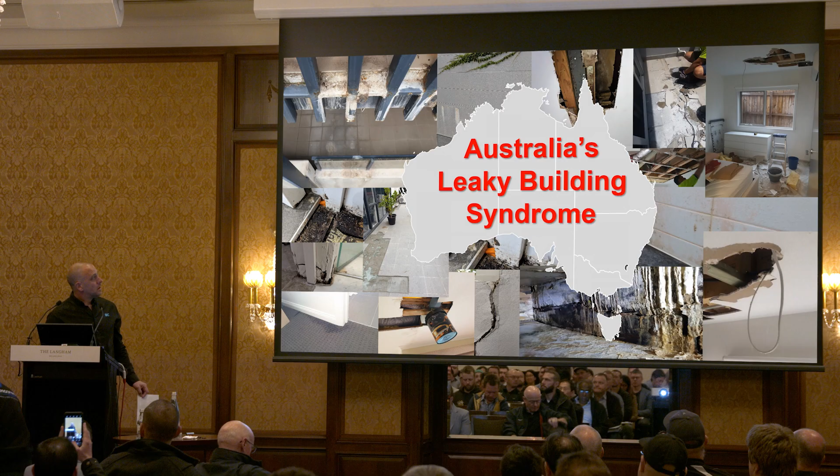And if you aren't aware, we're in a leaky building syndrome here in Australia. So I think that's why we're all here, because we are aware of it. And so we've been lucky enough to have the presence of the chair of the Waterproofing Membranes Association of New Zealand, to come over and talk about the history over there, what's happened there, and how it's very similar to what we're seeing over here in Australia. So I'll bring up Chris in a sec.

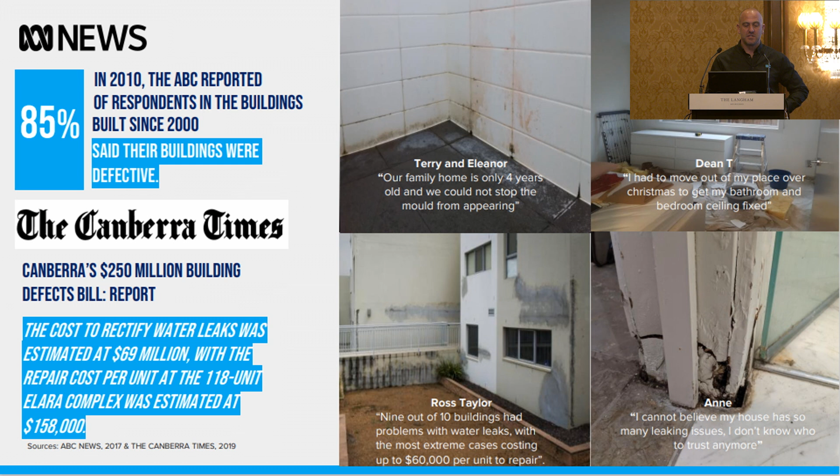So we're just going to run through, we actually have known about this problem for quite some time. So you see up there, top left-hand corner, in 2010, the ABC reported of respondents in buildings built since 2000, their buildings were significantly defective. And then as we go through time, a lot of these jobs here, these three here, are actually clients that I've dealt with. 4 years old, this property, class 1 building, volume house.

4 years old, that property, both bathrooms rectified, significant mould, which, you know, we're going to hear from Tim Law, who's a professor on mould and studying condensation. So we're going to hear about some of the severity related to that. Class 2 apartment building here, 18 months old, significant water ingress through the balcony.

This house here, ticking time bomb, 0405, triple storey townhouse in Ascot Vale. No warranty claim from the insurance, no builder's warranty left, 300 grand we estimate to repair her house. And then obviously we're familiar with Ross Taylor and what he's been doing up in New South Wales. So we're starting to capture some data.

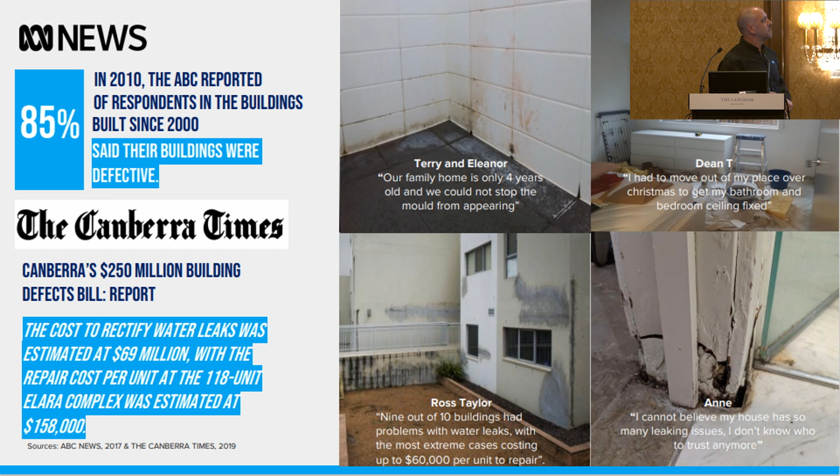So in 2019, I've caught up with Dr. Nicole Johnston on regular occasions. She was engaged with Deakin Uni in a joint study with Griffith University, where they did a combined audit on 212 buildings across the eastern seaboard to investigate combustible cladding. Non-biased study, what they found was that waterproofing defects were much more significant and deep-seated.

So I think you've got a crisis in this country. I don't want to downplay the issue in relation to combustible cladding, but I think water penetration issues in buildings are much, much bigger. I want you to put your hand up if you know anyone that's had a leaky building issue. Yeah. So for those of you who couldn't see what I could see, that was over 85% of the room.

We had 330 up in Parramatta. Obviously there's a bit more heat going on up in New South Wales, so there's a bit more urgency to get up to speed with what's coming in. I think there were 5 hands that stayed down. So everyone over the coming years is going to become very familiar with this if you're not presently.

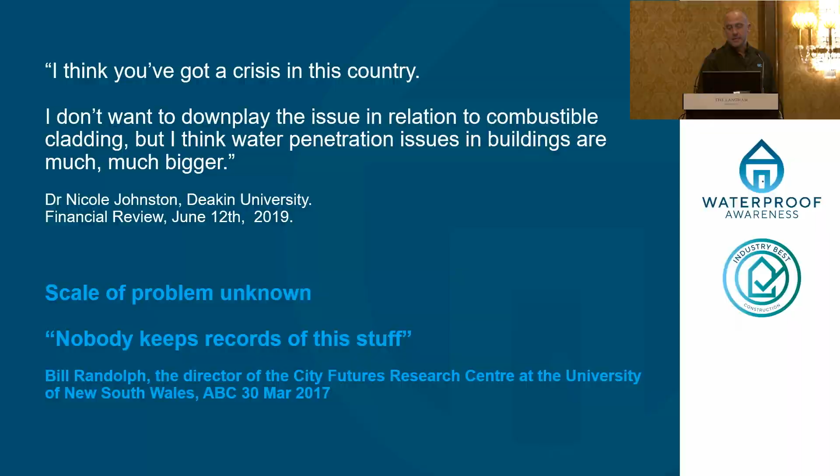So scale of the problem, unknown. Nobody keeps a record of this stuff. So that was back in 2017 by Bill Randolph. So I did this slide a little while ago. It's a little bit hard to get the data now because of COVID, but I am hearing that the building industry has not slowed down at all.

In 20 years, 3.5 million houses and nearly 700,000 apartments is what we've built. I've been doing audits in the class 1 sector, in the volume sector as well, and there hasn't been one house that would pass an audit. And we're building them quicker than you can repair them.

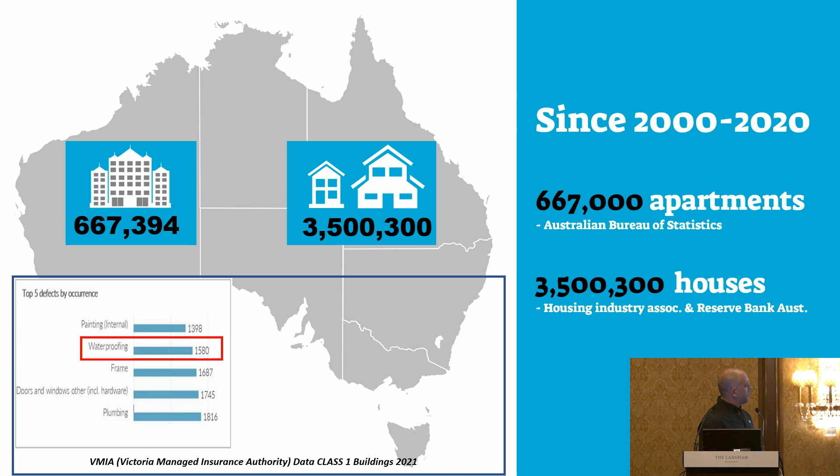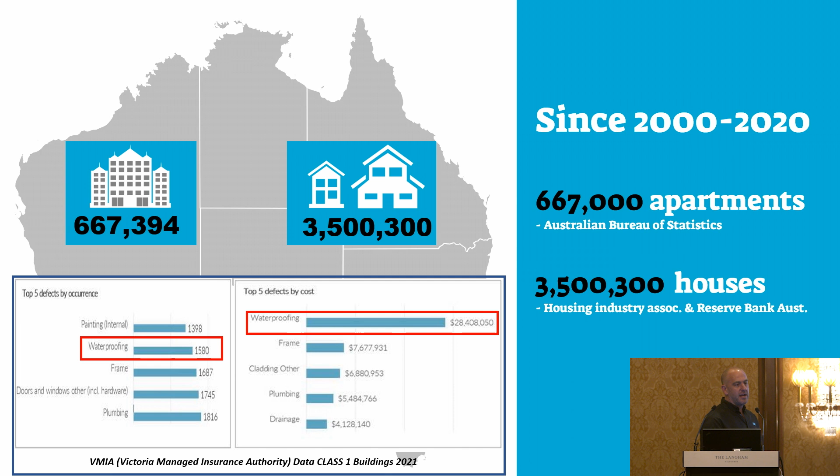So if we have a look at the VMIA, so the Victoria Managed Insurance Authority, some data coming out of them last year. Waterproofing ranked 4th in the most claimed defect. Then when we have a look at the cost, so by occurrence, plumbing failure is the highest, and we've got waterproofing. Then we see waterproofing 4 times more expensive than any other defect to repair. $28 million a year that they're paying out on claims. And if you've put a claim in with the VMIA, you probably know it's not the easiest one to get over the line.

So now we're capturing data. We can start estimating the costs of what it's going to cost us over the coming decades. With what we're doing, we're still building incorrectly for a period of years. That will still flow on because we need to improve the education. So we're going to see this problem still grow bigger and longer before we start to turn the cycle.

So David Chandler, I rate what David's done. There's been some collateral damage along the way, but you know what? As an industry, we've needed a kick in the arse. We've been doing the same thing, sweeping it under the rug for a long period of time. It'll be right, no problem.

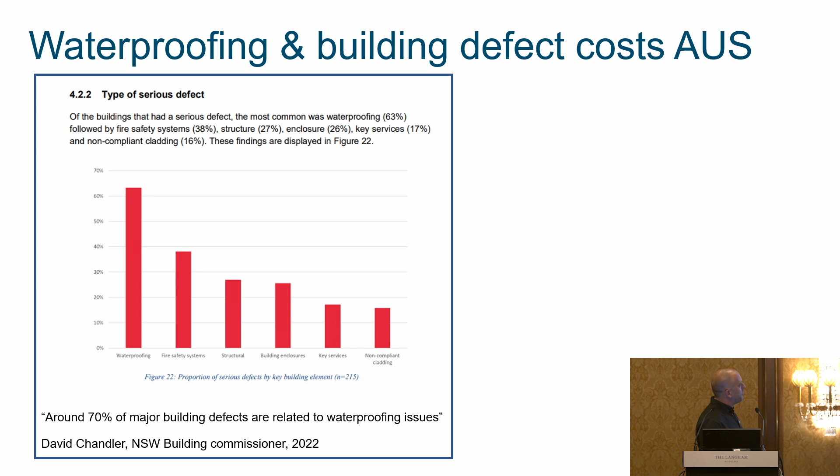Around 70% of major building defects are related to waterproofing issues. So we have a look there. Waterproofing ranks a lot higher than what we see in fire safety systems. In terms of what it's costing OCs, they're now looking at costs of, on average, over 300 grand per building. That's not all related to waterproofing, but waterproofing does hold a significant component of that.

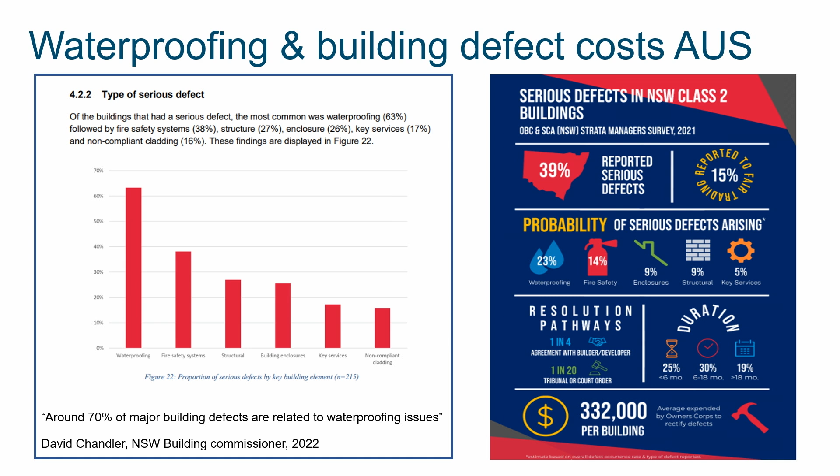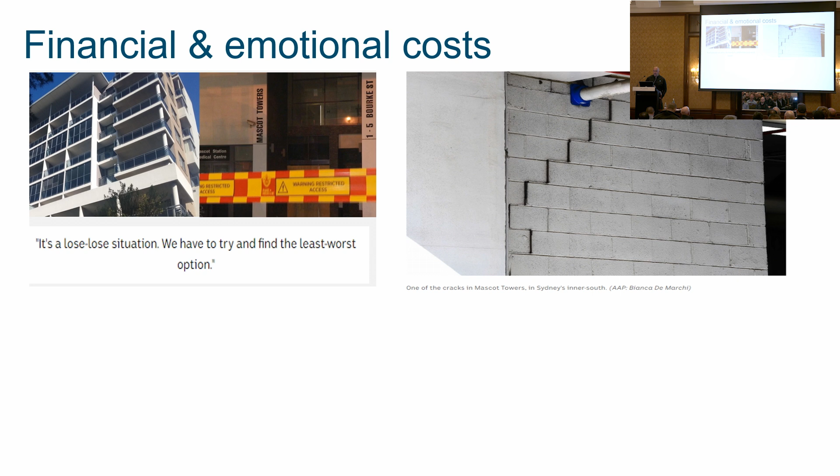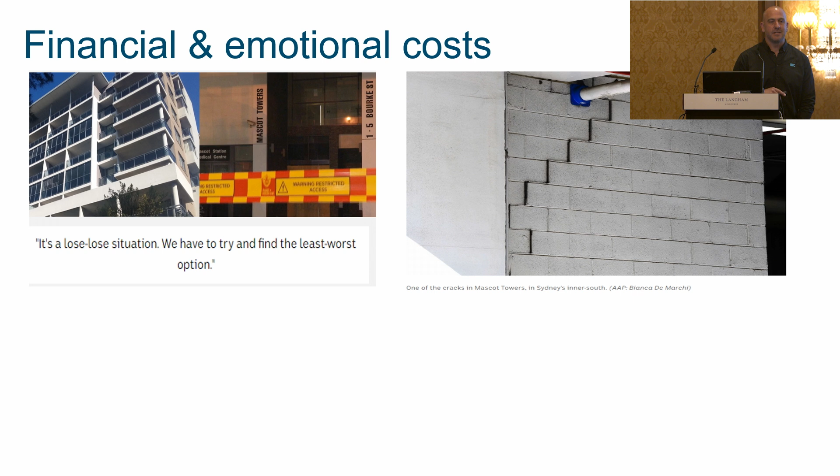You can see some significant structural cracking down in the basement. There's a slide in my upcoming presentation further in the day. Very prominent building in Melbourne, exactly the same signs of defects. Significant issues. And we'd all know the building if you live here in Melbourne.

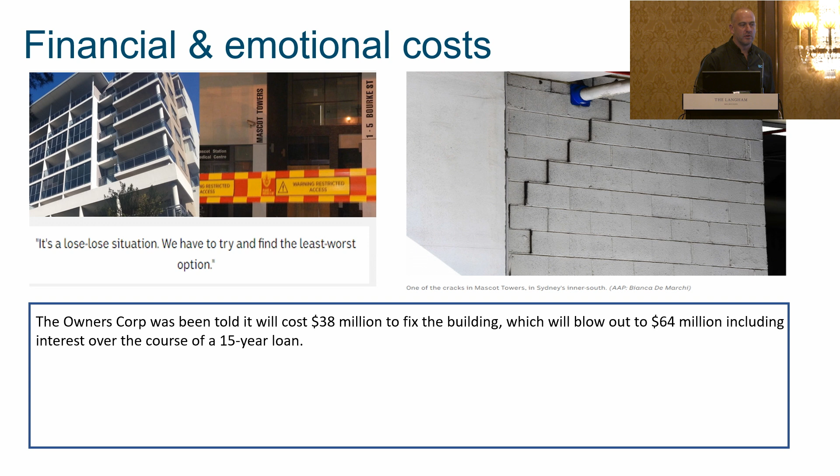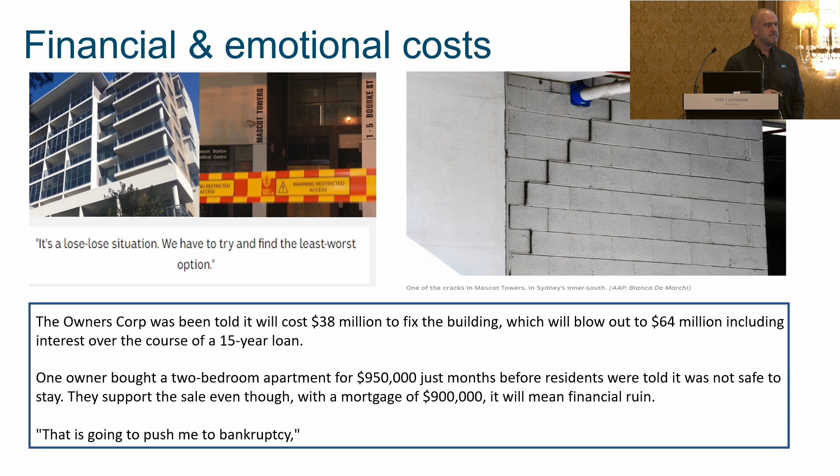So the Owners Corp was told 38 mil to fix the building, which would blow out to $64 million because they would need to get a loan in order to cover the costs. One owner bought the 2-bedroom apartment for 950 grand just months before he was told he had to move out. They supported the sale because it was a no-win scenario for a lot of the homeowners. 900K in the red, bankrupt. So would you say now that buying the great Australian dream is the Australian dream anymore? For a lot of people, nightmare.

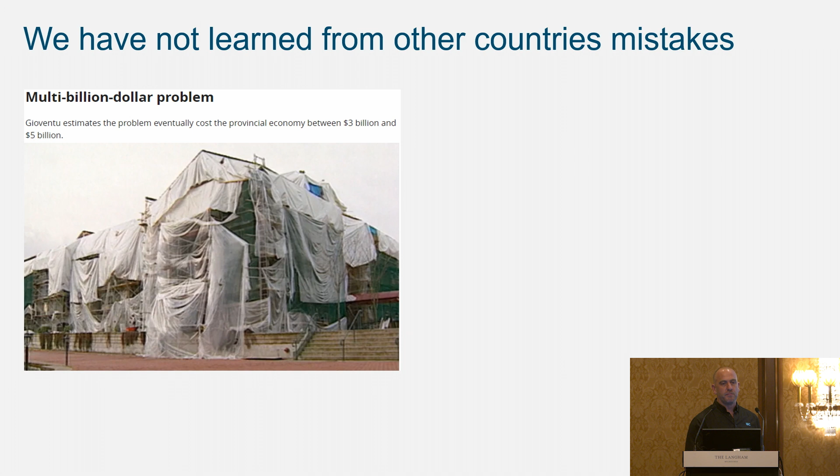We haven't learnt from other countries' mistakes. Leaky condo syndrome in Canada back in the 80s, 70,000 condos. Estimated cost of the situation back then was 3 to 5 billion. This photo was a photo that I captured out of a news article of them still repairing the buildings now. And it was from last year.

Miami building collapse. Links to structural defects related to below-grade waterproofing, exposing the steel reinforcement, which rusted out due to the salt in the air being right on the seafront. 12 floors. I'm not sure on the number who died. What I'm hearing is there's a possibility this could happen here. Great Australian dream or nightmare?